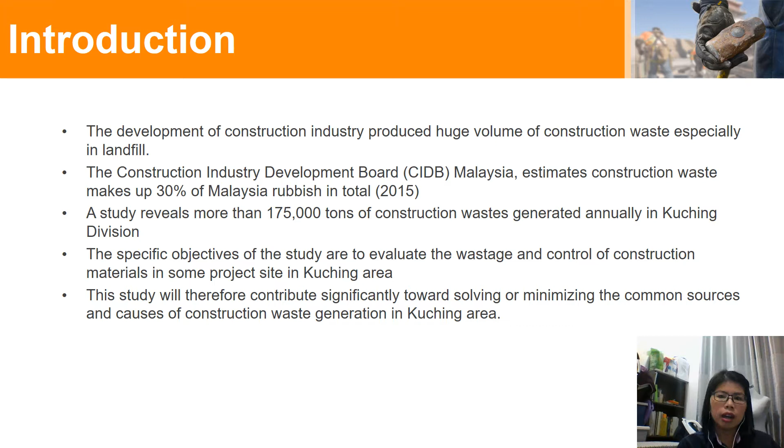For the literature review, I will explain what construction waste generally is, which is defined as waste and surplus building materials that are no longer in use. This waste comes from construction, demolition, or excavation. Construction material waste is usually produced directly or indirectly during construction work.

According to a study done by Foo in 2013, there are 5 main types of physical waste found at site: brick, steel, timber, concrete, and packaging waste.

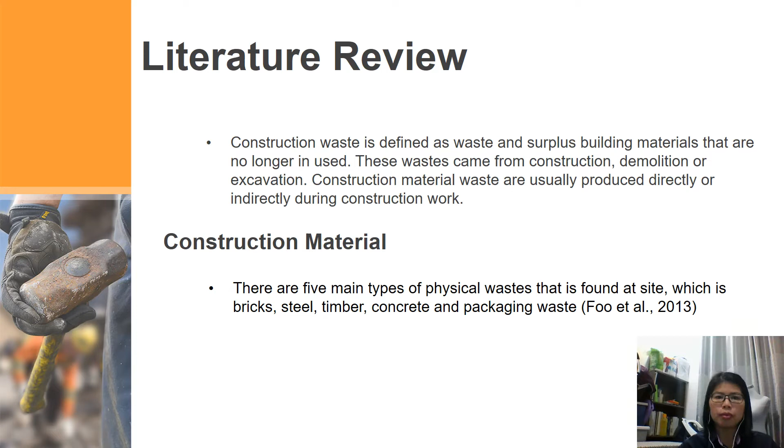For the factors of construction waste, there are 3 factors I will mention here. The first one is design. A study reported that more attention should be given to waste reduction during the design phase. Whoever is involved in any construction project should always keep good communication with the client and avoid last-minute changes. In addition, waste generated during the design process is mainly due to poor communication leading to overlapping of design.

The second one is management. One of the major causes of construction waste is improper waste management. A lack of waste regulation and improper disposal facilities are the sources of unsuccessful waste management, according to Njoroge 2012. In this category, wrong material storage and poor material handling become key factors for physical waste. Apart from this, physical waste occurs due to inappropriate protection strategy used during material storage. Without proper storage management, the material will end up as physical waste, according to Fung's research in 2017.

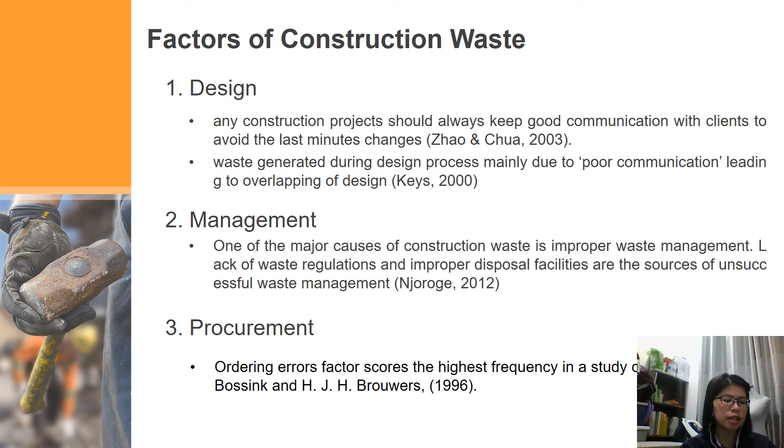The third one is procurement. Ordering errors factor scores the highest frequency in a study conducted by Bossink and Brouwers in 1996. This is quite an old reference, I'm sorry, but this is the only source I can find. Examples of waste generated from over-ordering materials in construction projects are excessive orders of bricks and concrete mixture that end up as waste. Sometimes poor ordering of material without specification details and low quality materials also cause physical waste.

For the impacts of construction waste, referring to a study done by Nor in 2013, the impacts of construction waste on the environment are unbalanced ecology, change of living environment, potential sewage, depletion of natural sources, energy consumption, and generation of waste.

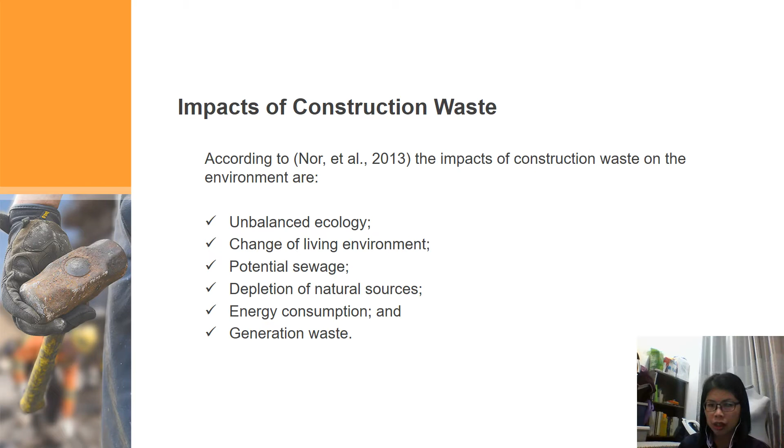For the methodology, in this study, a questionnaire was used and it was administered online and face-to-face. Developer companies that were randomly selected were requested to answer the questionnaire either via Google Form or fill in the questionnaire manually, via a web link to the online form, which was a Google Form.

The questionnaire required information from the respondents regarding their information, common sources of waste, causes of waste, and waste management. For confidentiality, respondents and their organization could request to remain anonymous. The data gained from the research were analyzed using descriptive statistics such as frequency and percentage via SPSS.

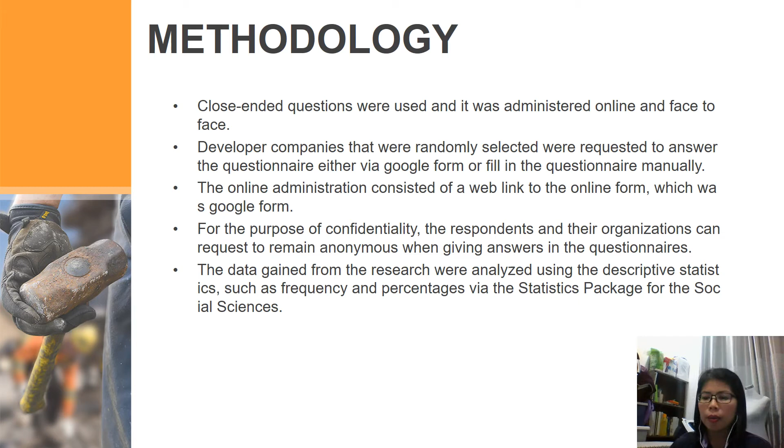This is the method that I used, and then the result from the questionnaire. The sample size for this study is only 9, because of some circumstances, only 9 responded.

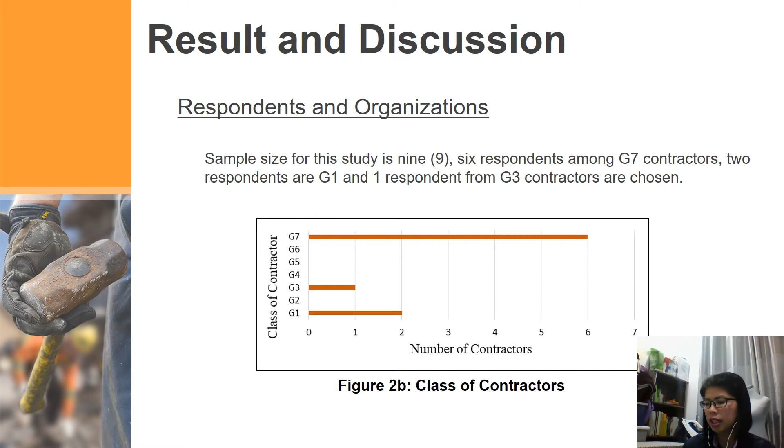There are 6 respondents among G7 contractors, 2 respondents from G1 contractors, and 1 respondent from G3 contractors. The contractors selected are undergoing residential projects around Kuching area. The respondents consist of quantity surveyors, engineers, architects, and even site supervisors.

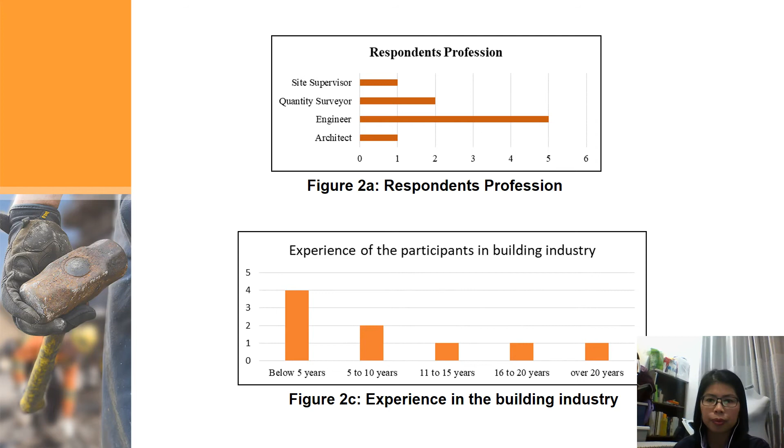As you can see from my slide before, the respondents of this study are mostly from well-established companies which have been awarded as G7 contractors by CIDB Malaysia. There are 5 engineers, 2 quantity surveyors, an architect, and a supervisor involved.

The packaging source includes cement packaging, ceramic tiles packaging for finishing works, and timber pallets. Usually, this packaging waste is generated at site during the delivery process. The excessive and wasteful cutting of blocks on site also contributes to the waste generation.

This factor was also reported in a previous study conducted by Foo, Abdurrahman, Asmi, Nagapan, and Khalid in 2013. The highest percentage of waste is also recorded for insulation, and this is supported by the study conducted on the true cost of waste in 2010, which estimated that sometimes materials are ordered more than needed, which can contribute to insulation waste on site.

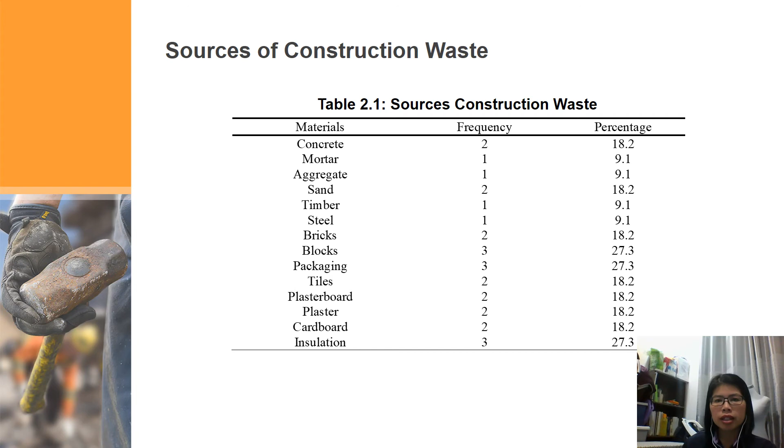The next findings are regarding factors contributing to material wastage. In this study, various factors contributing to material wastage were investigated, and the results are presented in Table 2.2.

The result revealed that ordering error remarked the most significant factor, with 36.4%. Among the 10 factors identified that I proposed in the study, the most significant is the ordering error.

The example of ordering errors includes excessive order of concrete mixtures and bricks or blocks. This was supported in a previous study conducted by Nagapan in 2012. From this result, about 27.3% of the respondents indicated that the material are not stored properly.

Large amounts of packaging waste from delivered material were also cited as a cause of construction waste increasing at site. For instance, cement wrongly stored in open space without proper protection can cause the material to be exposed to moisture and rain, and this poor storage will lead to abundant waste generated.

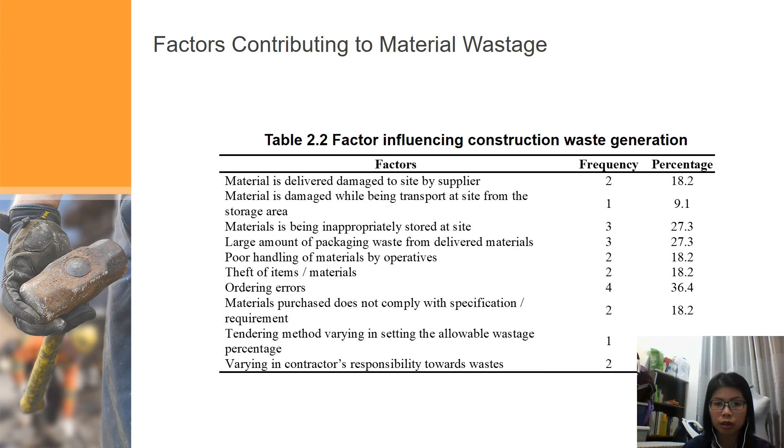Okay, next are the strategies used to minimize material wastage. These are the strategies currently applied by the contractors in Kuching area.

The most practiced prevention method observed from this study is storing material correctly on site, at 72.7%. Most companies agree it is important to provide safe and efficient material storage. The arrangement of storage management needs good cooperation and coordination between everyone involved in the construction industry. Failing to manage material storage may contribute to wastage, as materials can be damaged due to incorrect storage.

The use of trained and qualified operators to use the correct equipment during a task, at 72.7%, was also voted among the most practiced waste prevention methods. The third most practiced waste prevention at site is updating schedules promptly on any design changes. This means any changes in design, such as drawings or material use, should be updated to the construction team immediately, since design changes during construction can contribute to material wastage.

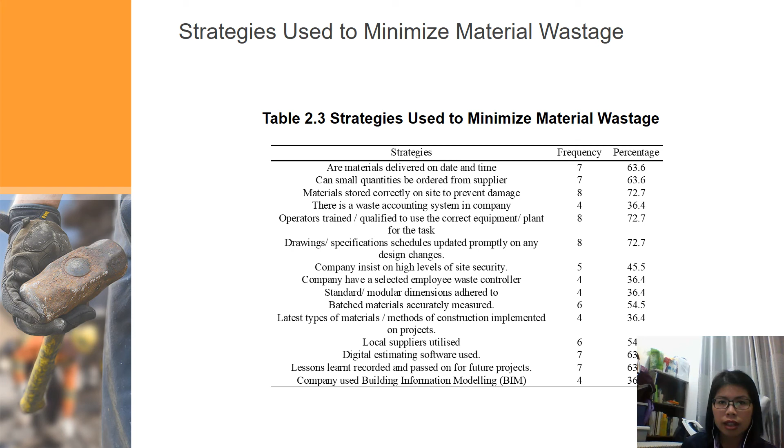And then the next one is: what are the construction waste controls applied by the developers or contractors in Kuching? A few measures have been identified which have been applied by the selected companies in Kuching to limit the amount of construction waste material. The data obtained is shown in table 2.4.

The practice voted the most is using offsite fabrication, with up to 7 companies using it, about 63.6% of the total number of companies.

Other commonly used practices are frequent reviews on the work program, regular talks on material storage and handling, increasing site supervision, reviewing the contract clause, and accurate measurements for material use at site. The least used measures are reusing material for other projects and recycling waste material, used by only a small percentage of the selected companies to limit the amount of construction waste.

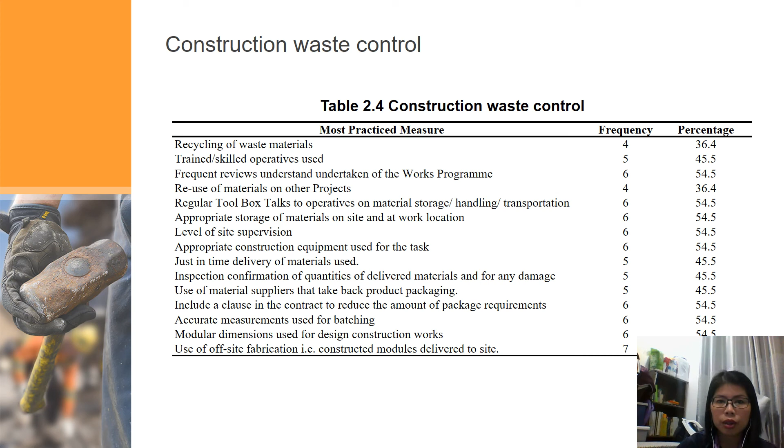Okay, so the conclusion for this study. The conclusion that can be drawn is that blocks, insulation and packaging remark the most sources of construction waste generation in Kuching, Sarawak. Therefore, these wastes are essential and have to be managed properly.

The amount of construction waste generated at a construction site depends on various factors. From the results obtained, ordering errors remain the most significant factor in waste generation. Hence, it is recommended that proper management, especially procurement documentation, be applied at construction sites. Construction waste management also needs to be cultivated in every construction sector, as these are among the vital approaches for sustainable construction to be achieved.

Among the best practices applied by these contractors are storing construction material correctly, hiring trained or qualified equipment operators, and updating drawings or specifications promptly for design changes to minimize construction waste.

Even though it shows this, the practice that is not popular in Kuching is regarding the reuse of material. This is because it is not popular among developers, as they prefer offsite construction and offsite fabrication.